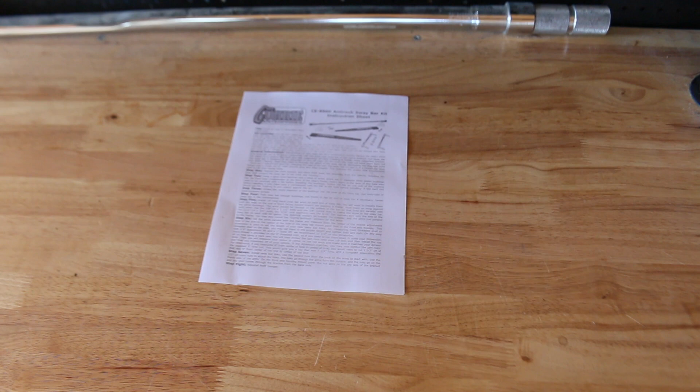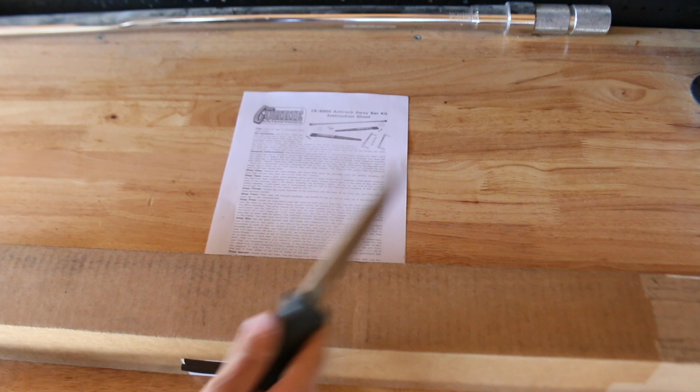So the Currie anti-rock. Why? Well, let's open this box up, and then I'm going to go ahead and tell you why I chose the anti-rock over everything else on the market for a TJ. First, let's get this open.

Alright, so what do we got? We got our arms, looks like, bushings. These are probably the links. And links and hardware. Alright, so now that we got all that, and this bar.

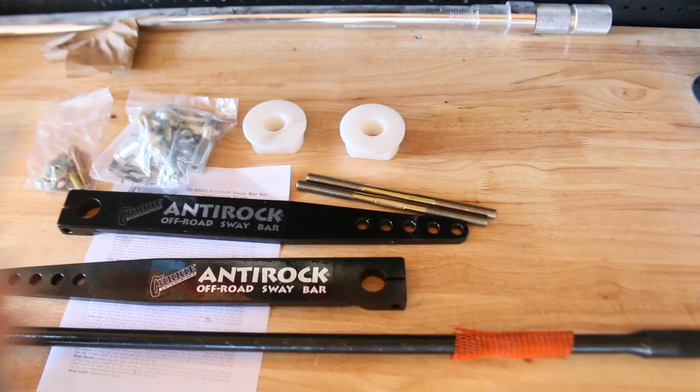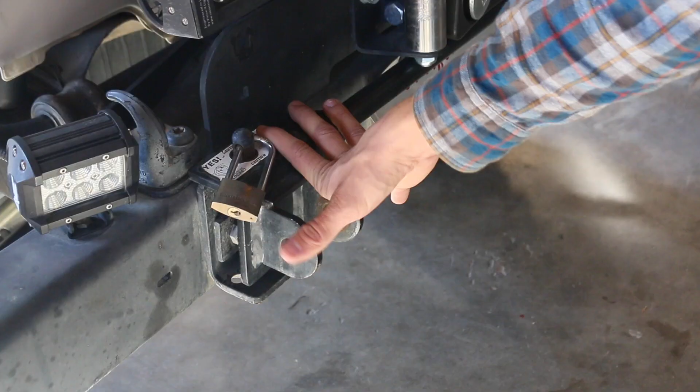Okay, perfect. So now that we have all the parts out of the box and we see what we have, let's go ahead and get our current front sway bar disconnected and removed. We're going to have to kind of get all of this stuff unbolted so that we can get this off, so we can get the bumper off, and so we can get the sway bar off.

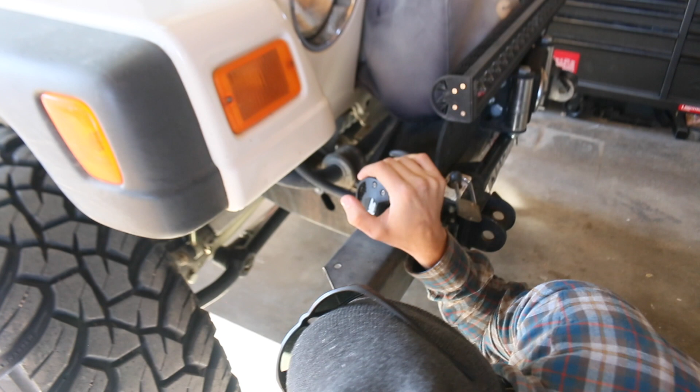Okay, first things first, we're going to unplug these lights just so we don't pull on the cables. Luckily when I installed them, I used the factory harness. So you may have to clip some zip ties all the way to get to it though. There we go, there's that one, and then we'll do the other side.

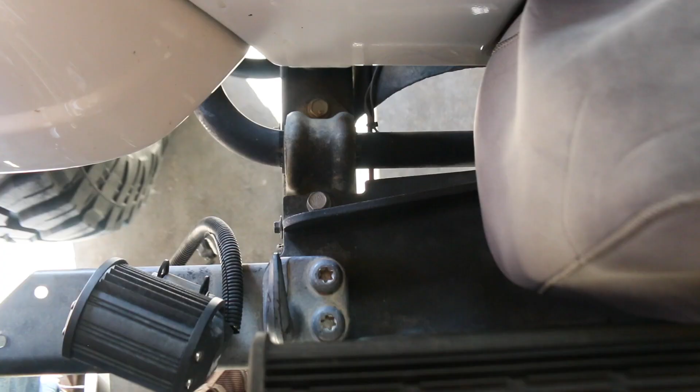Okay, so to undo these back two bolts, it's a 15mm socket, and to undo the front two, it's a Torx 55. So let's take these two out and these two out.

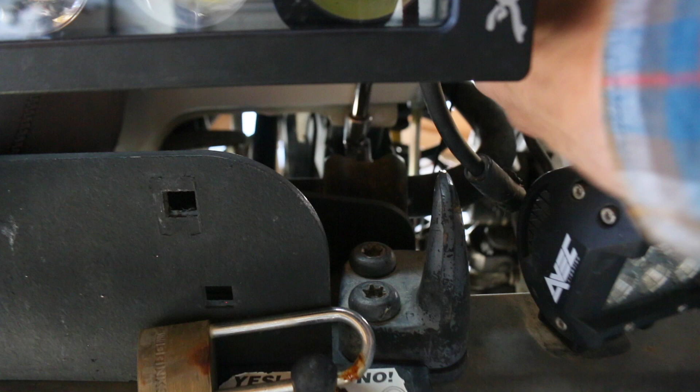Okay, now that that's loose, we got to do the underside of the bumper. There's just one bolt. Should be the same Torx.

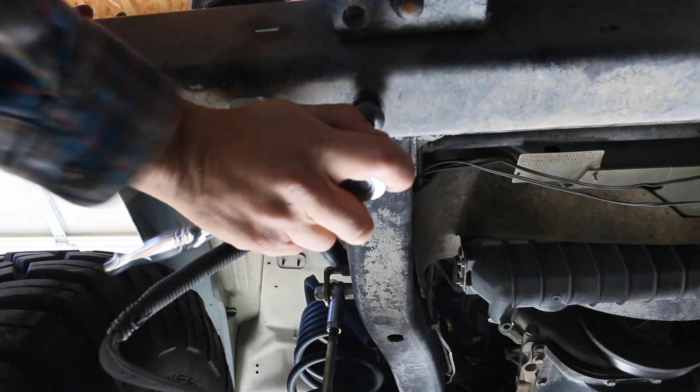Alright, now to see if we can get this bumper off, let's undo the linkages and then pull this bar out.

Okay, now that those are all done, let's see if we can tilt this forward and get this bar out without dropping everything.

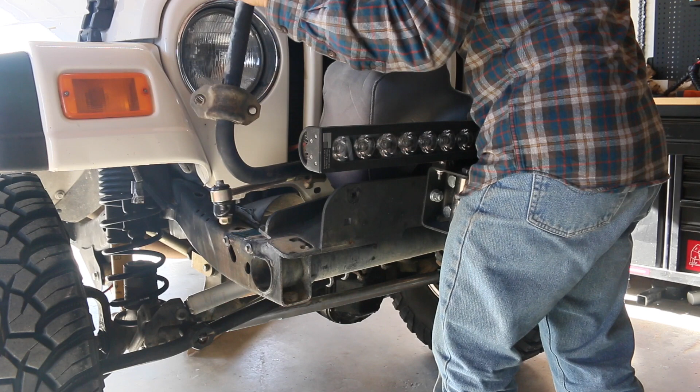Looks like, though, that we're going to have to trim that bolt. So let's make a mark on it.

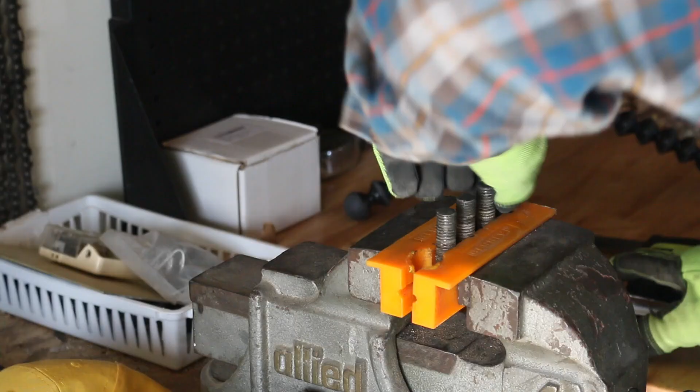Okay, now that that's done, let's go see if they fit. Okay, so the reason we had to cut the bolts down is because the bolts will come through here and through this tube, and we want this to be flush right here. So you don't need to take very much off. I think I took a quarter of an inch, but you can see the cut bolt right there.

So we're going to leave these in for now, just to hold the winch there until we get the whole sway bar in. But now let's start getting the bushings in.

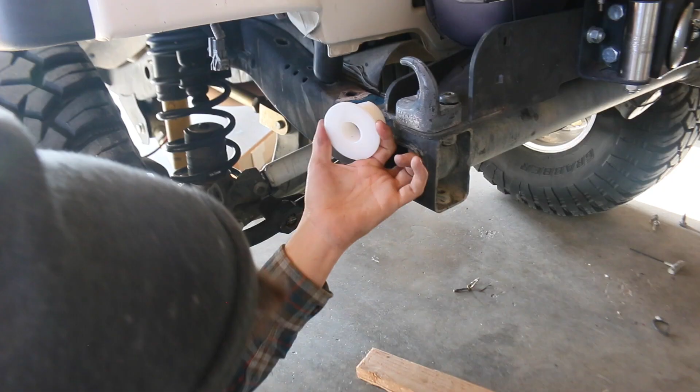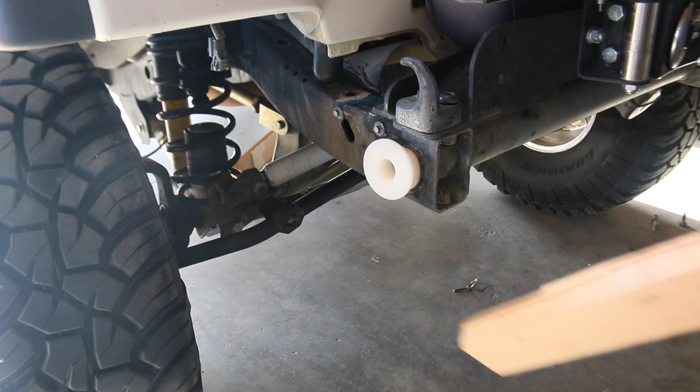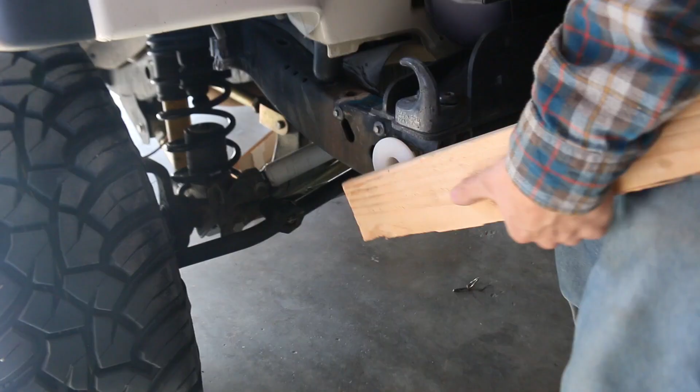Now that's kind of started, take your block of wood, whatever you have, and just kind of start pounding. There we go.

Okay, so those are in nice and tight. Now we gotta put our tube in, or now we gotta put our torsion bar in.

Alright, so this next part requires the torsion bar and a good amount of grease. So we're gonna grease the bar up. Just take the grease gun and apply a liberal amount of grease to the whole thing. That way when we push it through, it slips easier. So let's stick it in there, see if we can at least get it in there.

Might have to use a piece of wood and a hammer, because that is not going in easy. Alright.

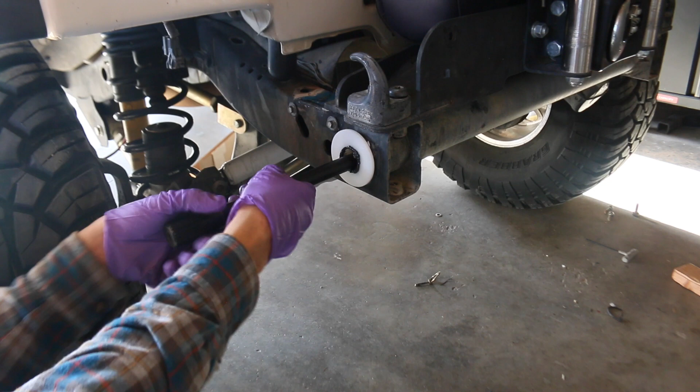So now we'll take this and run it through. Good amount of grease on this. Then I'm going to put some on the other bushing, and then we'll take a screwdriver and just put it in here, and all you're doing is just lifting the bar so that you can line it up to this bushing, so when you pound it through you don't knock the other bushing out the other side. Okay, that should be it right there. Let's see if we can give it a whack and get it in.

Okay, so now what we're going to do is we're going to get these arms on. So let's do that.

Okay, so the next thing to do is to take these end links here, these arms, and it says to push them up snug against the bushing.

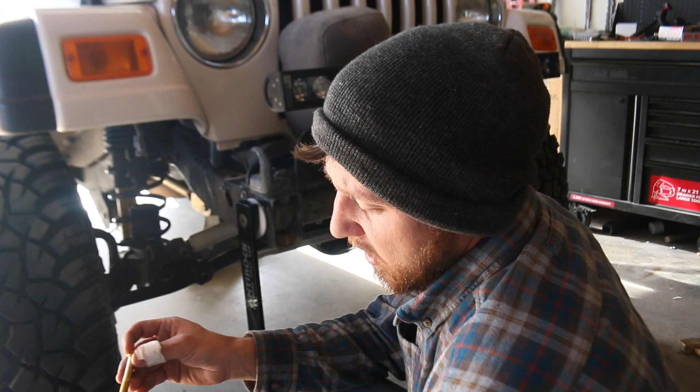Now we're supposed to install these longer bolts and the nylon nuts. So we'll go ahead and do these loose, and we'll come back and tighten them down.

So for the ends of the swaybar to keep the arms on, you use your shorter bolt, your lock washer, and then the big flat fender washer looking thing. So your setup will look like this.

Also, I'm going to put some red Loctite. This is JB Weld thread locker, but same thing. We're going to put some red high strength thread locker on there. That way these do not come undone, because we don't want these to loosen up.

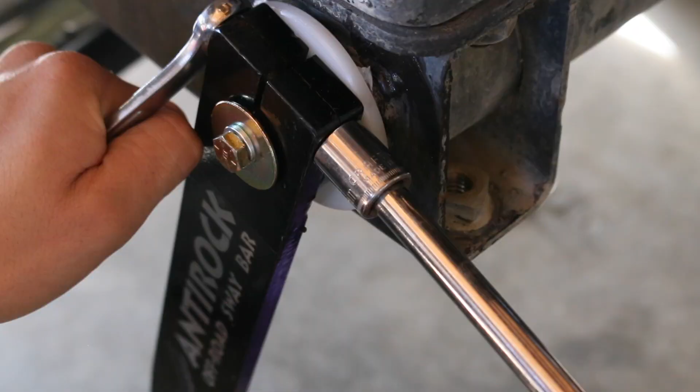That's pretty tight. Okay, let's go to the other side now.

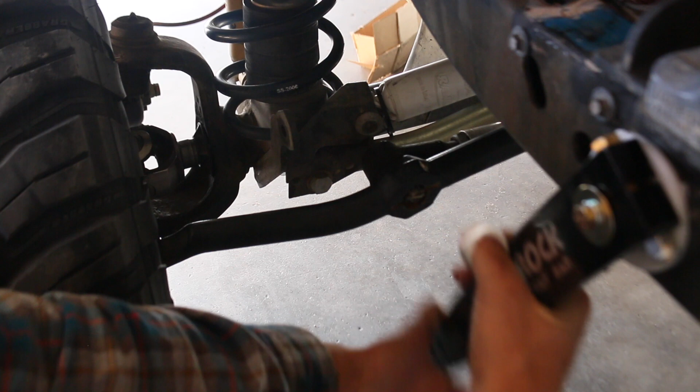So in my case, they tell you to install them down like this so you can get them parallel, but if you do that, you can't get it past your suspension.

So let's jack up the other side of the axle and see if we can get this side to come down, and then we can swing this up.

It's about maxed out on the jack. Let's see if it works. Oh yeah, just barely.

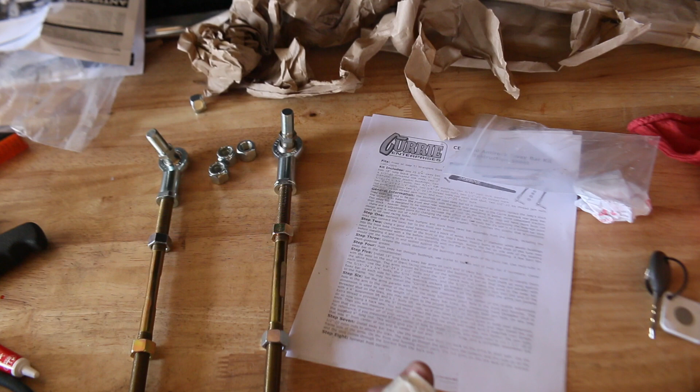Sweet, I can just stay up there for now. Perfect. Now in the directions they say for a 4-inch lift with a 1-inch body lift, they recommend 10 inches, and they also say to set the bar level with the frame. I have a 3.5-inch lift that comes out to 4 inches, and a 1.25-inch body lift.

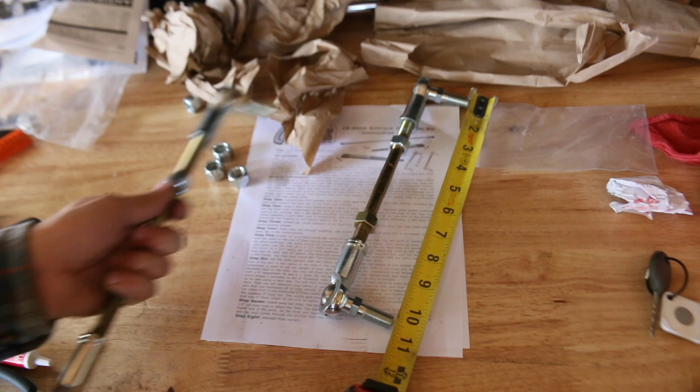So we're going to try the recommendation of 10 inches and see where we get. Okay, so we're pretty close to where Currie tells us we should be for that setup. So let's put this link on. And that's the cool thing about this: we'll put this link on, and then this other link we'll just adjust to the other side, so we don't have to try to get them both the same length, because we'll just slip it in. So let's go put this one on.

Alright, so there you have it. The Currie antirock is installed, ready to go. Let's go take a test drive, and then I'll tell you the real reason I bought it. And it's not for off-roading, because we all know that the Currie anti-rocks are pretty good off-roading. Let's go for a drive first, test it out, and then I'll tell you why.

So then the question is, why did I choose the antirock if it wasn't for off-roading? Well, not too long ago, I was actually hit on the freeway with my Jeep on 395. Luckily my Jeep seems to have fared minor injuries, no body damage. I got hit on the front tire, and I was towing a small trailer. During that incident, I realized that having no sway bar is a stupid thing. I got hit, and the sway bar is what helped keep me on the road towing the trailer.